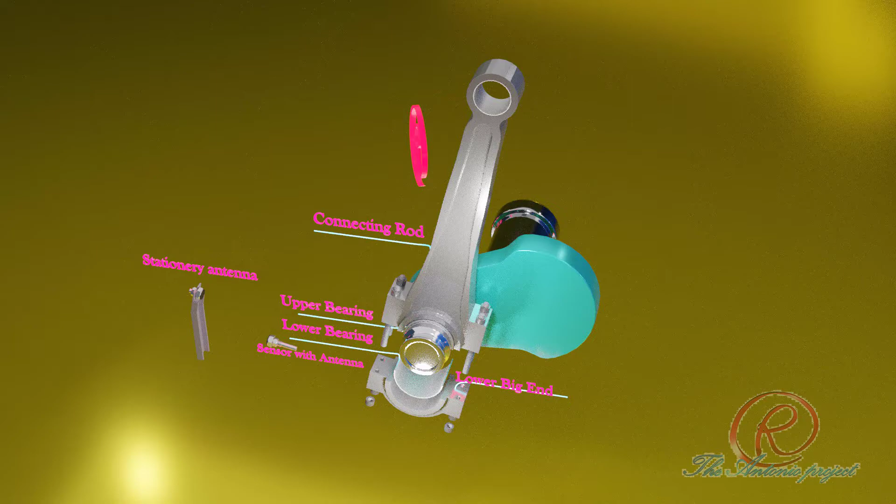The Antonio Project presents: Dual fuel diesel engine big end bearing temperature monitoring.

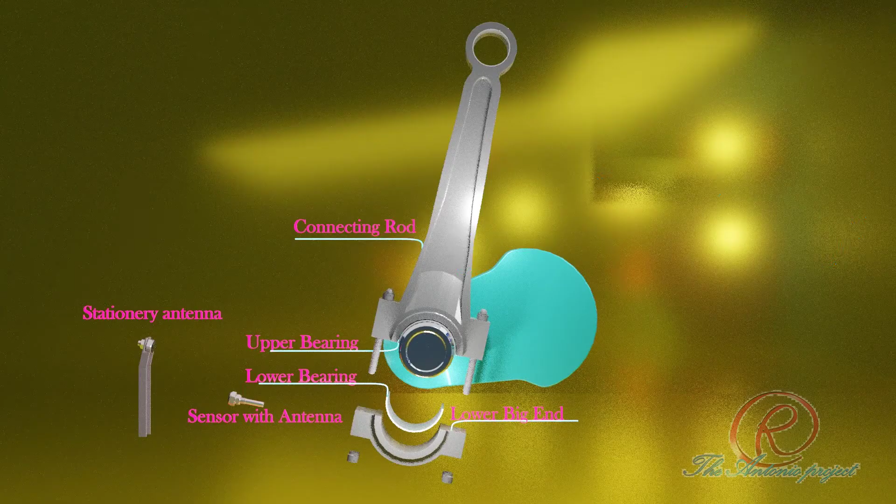So here is the animation. Let's start the animation. Wireless temperature monitoring.

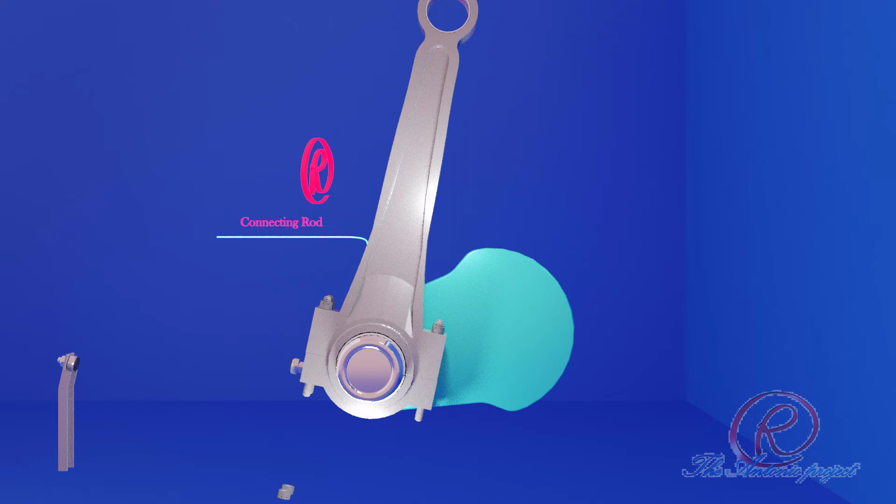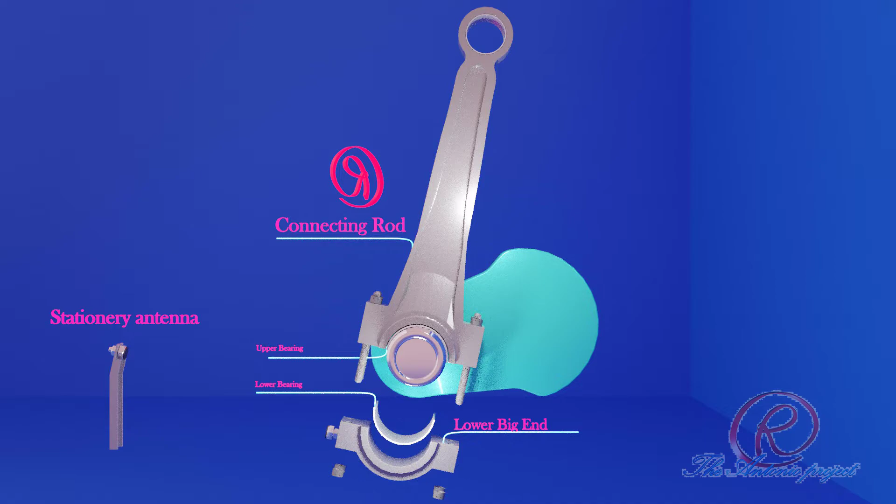Dual fuel diesel engine big end bearing of connecting rod can experience rapid temperature change during damage development. Due to the connecting rod rotating, in order to monitor the temperature, a sensor which is not connected with any cable is required. Sentry is designed to monitor the temperature in these bearings and give immediate temperature response to the monitoring system, avoiding fatal damage of the engine.

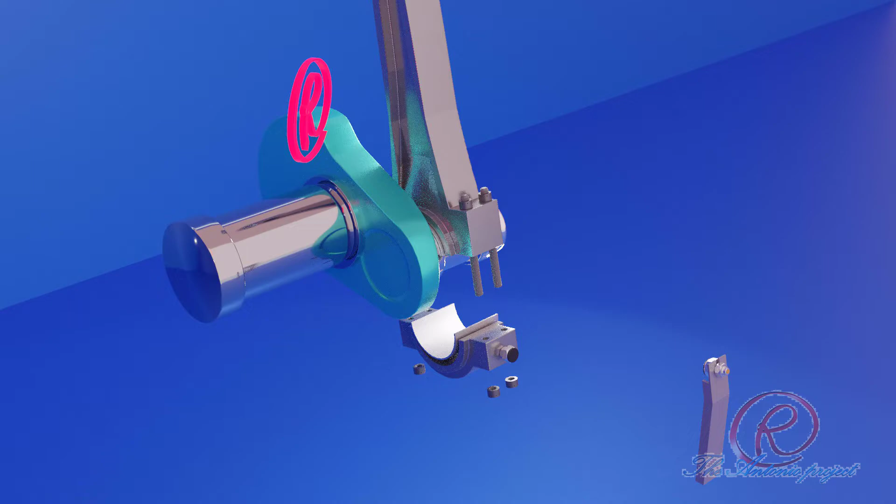Connecting rod assembly is as follows: connecting rod upper, big end bearing, sensor with antenna, stationary antenna. Sentry sensor can be installed on the connecting rod without any cable, no active electronics in the sensor, no battery, no slip rings. This is the advantage of this sensor: it is a wireless sensor that can be mounted on a rotating part without interfering with its function.

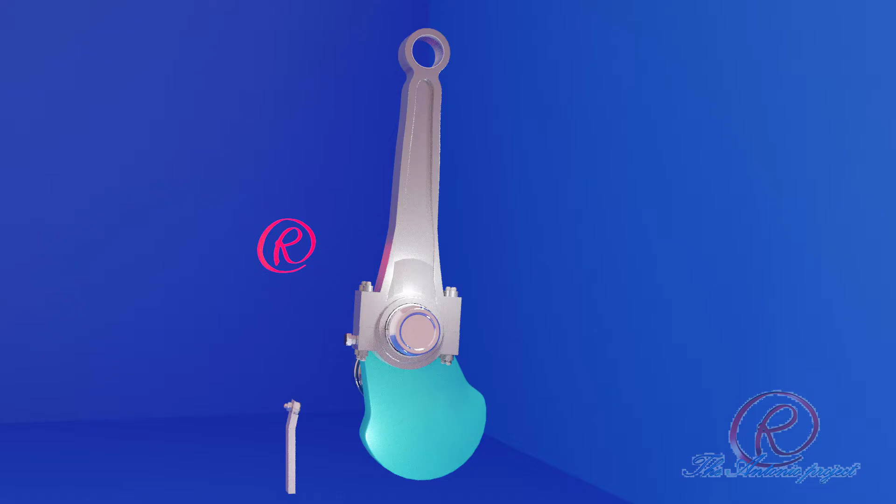Sentry GB200 wireless temperature monitoring. Following is the part name of Sentry GB200 wireless temperature monitoring. The main parts of the system are the temperature sensor, the stationary antenna, and the signal processing unit, or SPU.

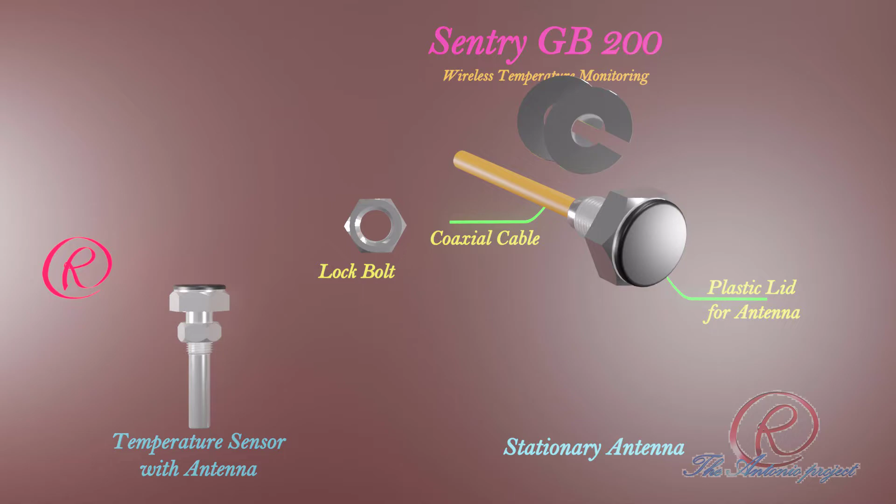Sensor consists of adjusting bolt and antenna, where the antenna is covered by a black color plastic lid. Stationary antenna consists of antenna covered by black color plastic lid, coaxial cables, bolt, and spacer ring. The spacer ring is used for adjustment of the gap between sensor antenna and stationary antenna. The bolt is used for fixing the stationary antenna to the bracket.

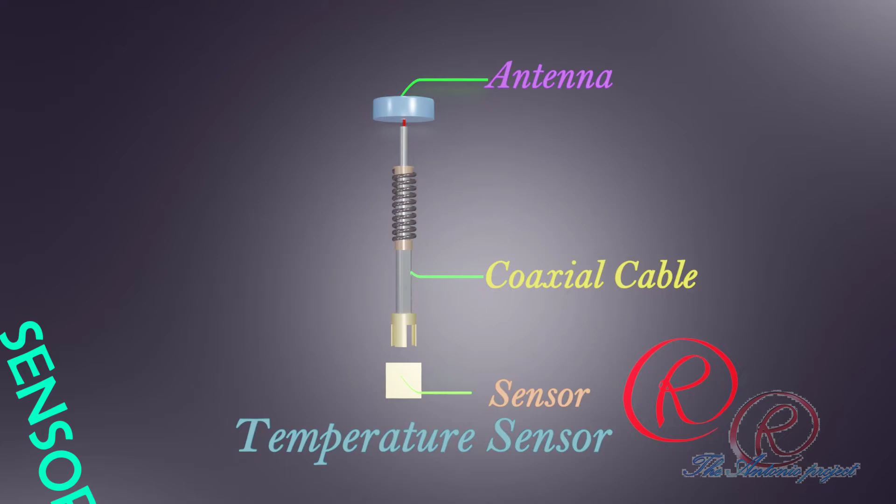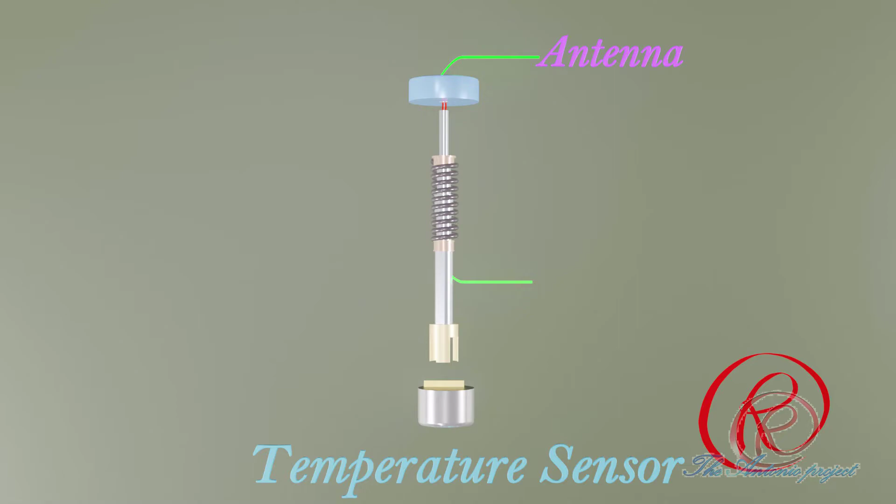Sensor assembly. The temperature sensor assembly consists of dish-shaped antenna, coaxial cable, and surface acoustic wave, or SAW, sensor. The sensor and coaxial cable are placed in a cylindrical steel sensor casing filled with epoxy. The antenna is placed in a steel housing and protected from the environment by a plastic lid. For explosion-proof application, the plastic lid is of static dissipative material to prevent electric charge build-up.

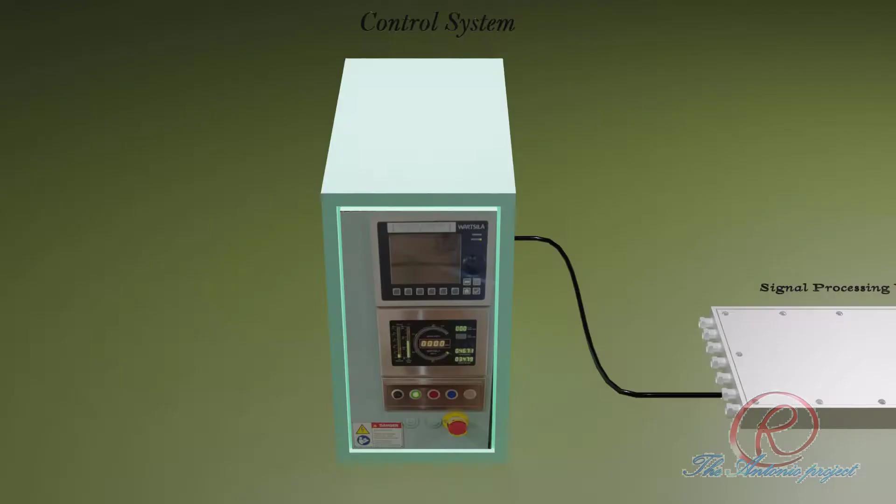Working principle. Working principle of the wireless temperature monitoring: the function is based on the surface acoustic wave, or SAW, technology. The output signal is determined by measured area absolute temperature.

The signal processing unit generates a low energy and high frequency radar pulse, which is transmitted to the wireless sensor via the stationary antenna. When the wireless sensor passes the stationary antenna, it is hit by this radar pulse and immediately reflects a pulse back to the signal processing unit. The temperature of the sensor uniquely determines the shape and characteristics of this reflected pulse. A software algorithm then calculates the temperature and transmits this to the engine monitoring and control system.

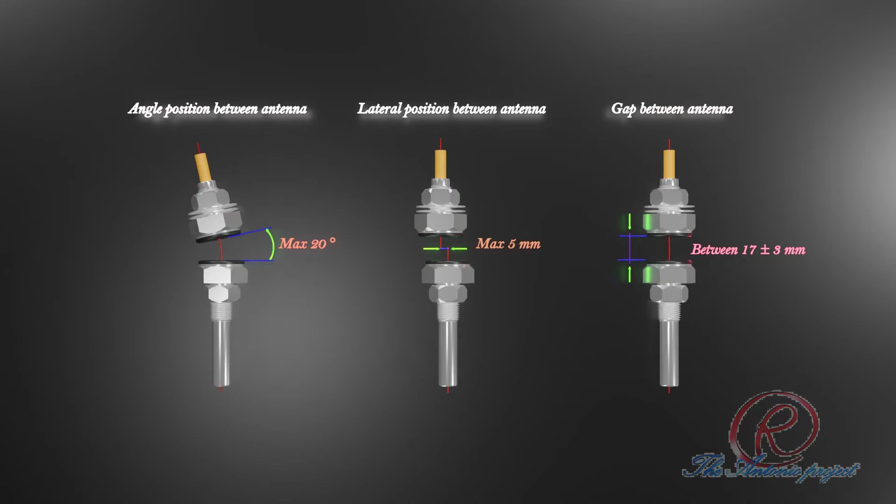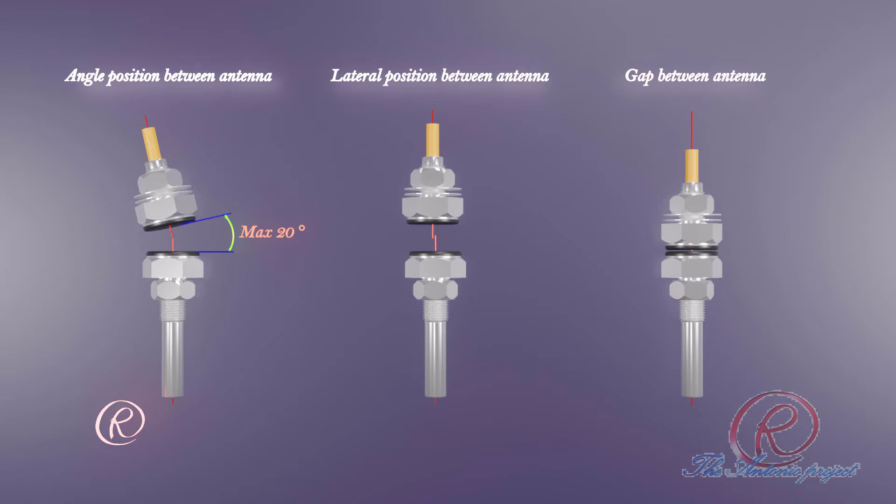Installation position. The installation of stationary antenna relative to the internal antenna of the wireless temperature sensor is extremely flexible and non-critical. The angle position between the antennas should be maximum 20 degrees. The lateral position between the antenna should be maximum 5 mm. The gap between the antennas should be 17 plus minus 3 mm. The maximum antenna air gap is also limited by the signal cable's length.

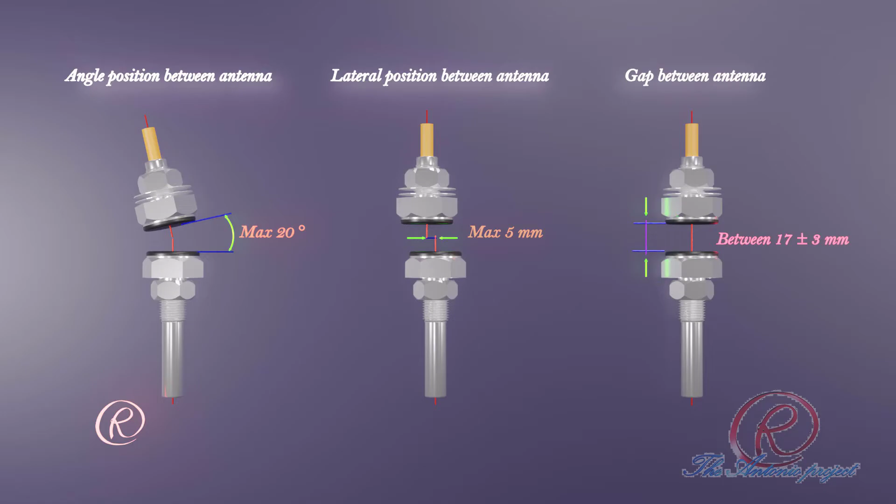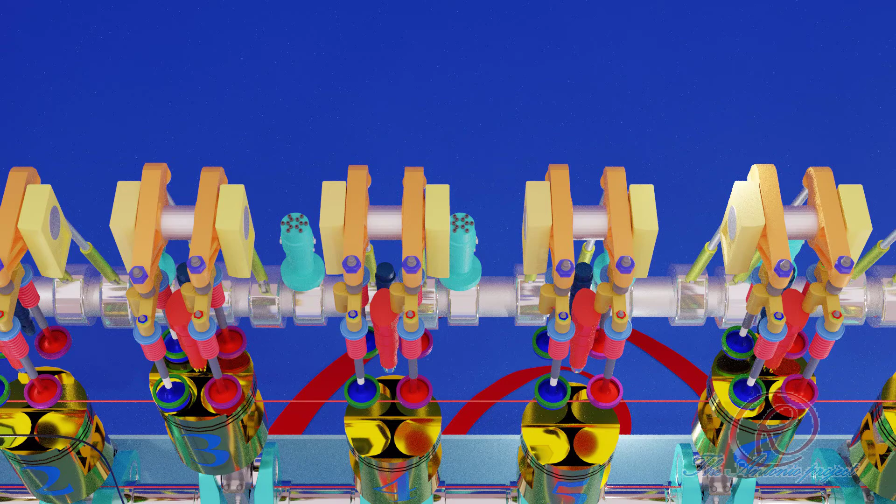Working position. Installation on the engine side: the temperature sensor is mounted on the connecting rod close to the bearing shell's backside. The stationary antenna is mounted on a bracket fastened to the engine block or crankcase cover, and the signal processing unit is mounted on the engine block.

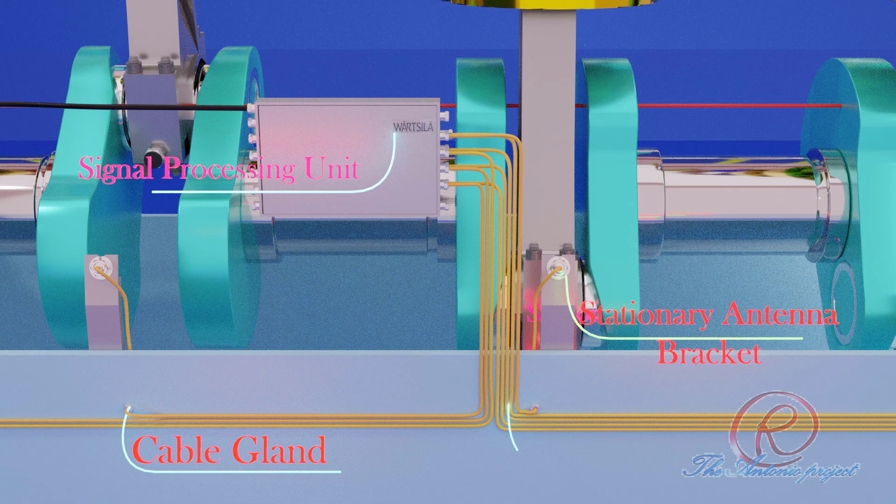The cable gland connects the inside stationary antenna cable with the outside coaxial cable going to the signal processing unit, or SPU, and the shielding of the coaxial cable to the engine potential level. The signal from SPU is then transmitted to the monitoring and control unit.

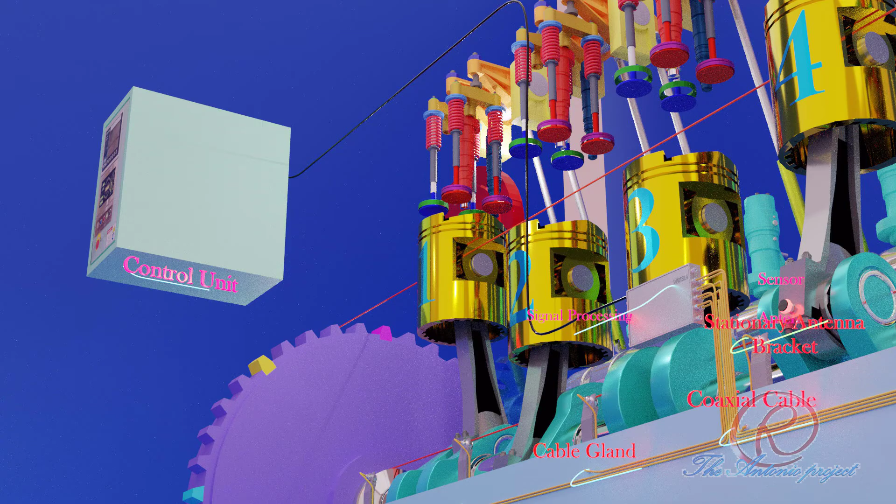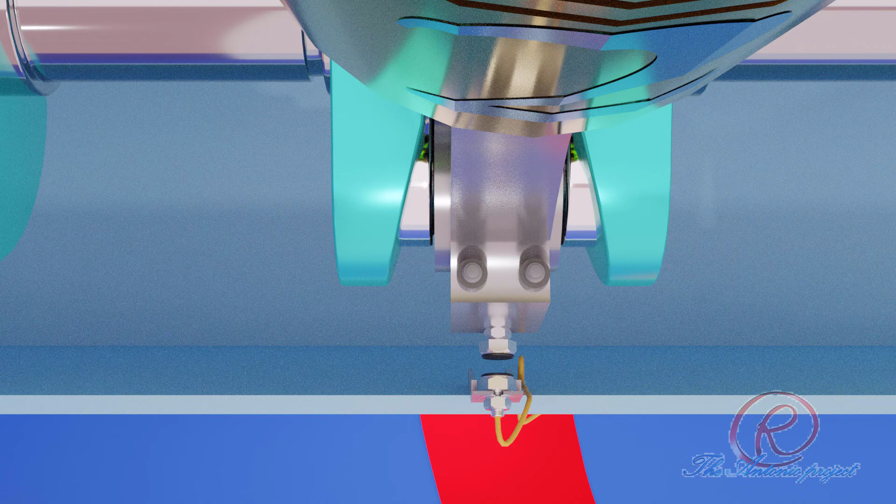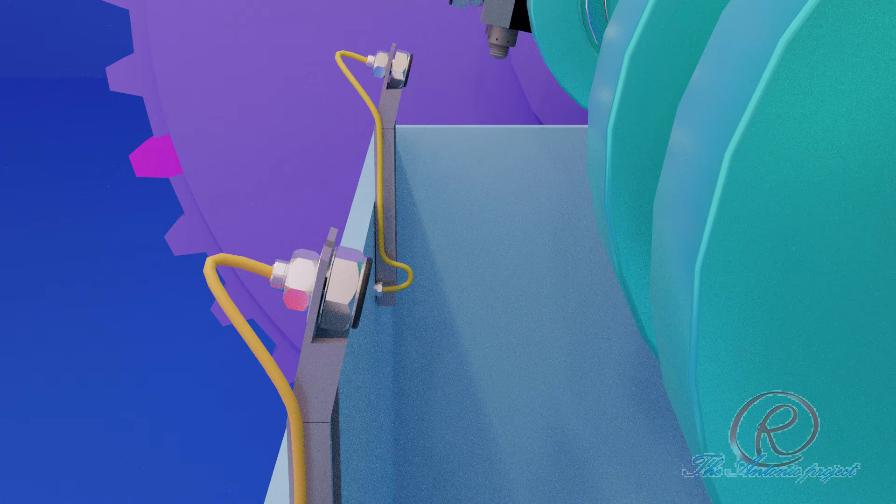The sensor's radio frequency, or RF, pulse excitation is transmitted via two antennas: one stationary antenna and one in the temperature sensor mounted on the connecting rod. The RF pulse transmission to the sensor and the output signal reflection from the sensor take place when these two antennas are within a set distance of each other.

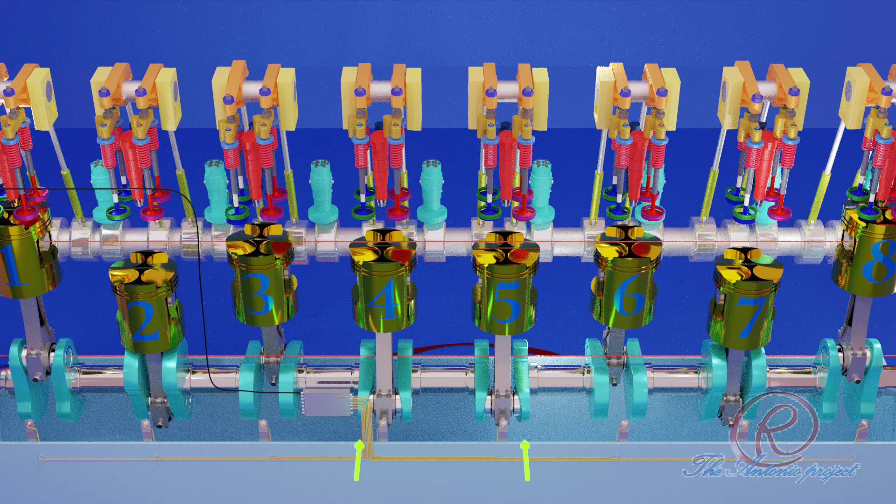The sensor signal is transmitted from the stationary antenna to the SPU via a coaxial cable. The SPU calculates the absolute temperature and sends the information to the external alarm and monitoring system as a CANopen or an RS485 Modbus digital signal, or optionally as a 4 to 20 mA output.

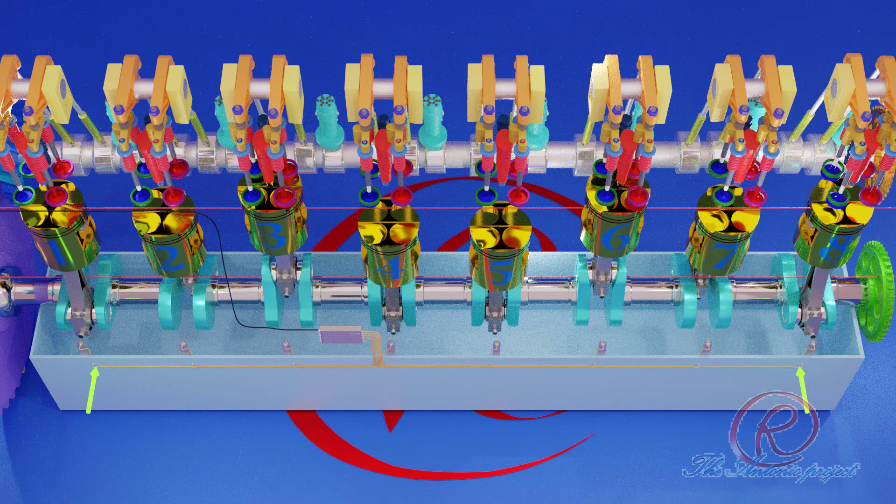RF transmission can be transmitted only while both antennas are in range, but since engine RPM is 720 RPM, the temperature indication is continuously monitored. The minimum RPM is set to 300 RPM. Setting is 50 to 60% lower than the minimum allowed RPM on a running engine.

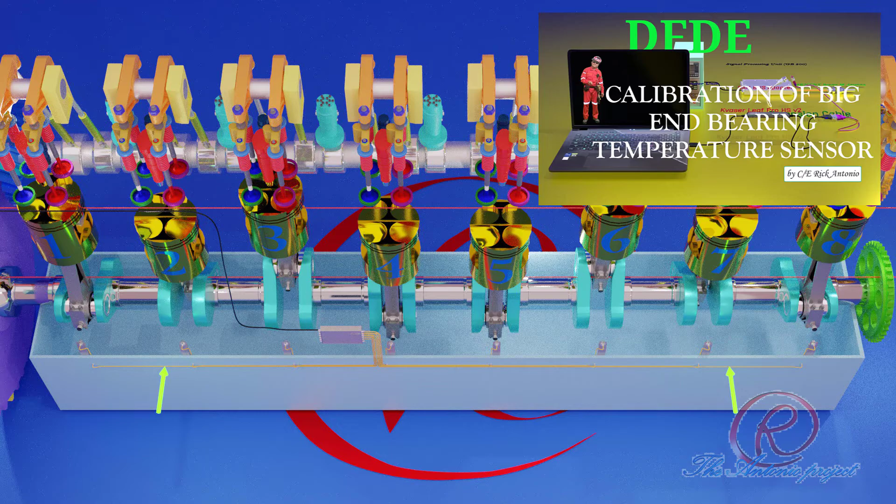For the setting and calibrating of the sensor, please watch my next video about calibration of big end bearing temperature sensor.

I think that's all my brief explanation about Sentry GB200 wireless temperature monitoring based on surface acoustic wave, or SAW, technology. If you want to dig deeper about this sensor, please watch my next video. This is about how to calibrate big end bearing temperature sensor.